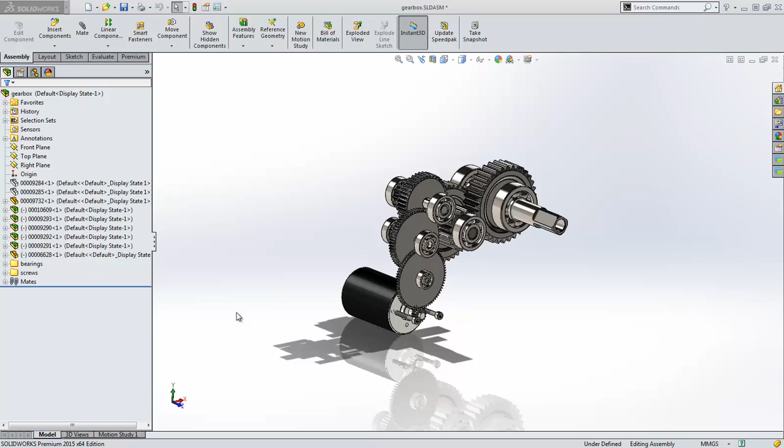SolidWorks 2015 introduces some great new enhancements to make your everyday experience easier and faster. The new View Selector gives you the ability to easily manipulate the view. Previews are also available, even if the view plane is obscured.

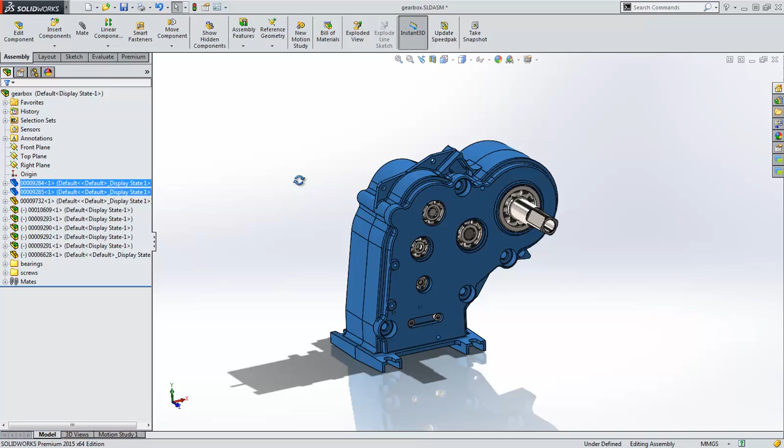Hidden components can now be previewed from the Feature Manager, without having to unhide unnecessarily. Isolating components is also improved in SolidWorks 2015. You can now isolate a component whilst editing it, and also isolate components from a common mate.

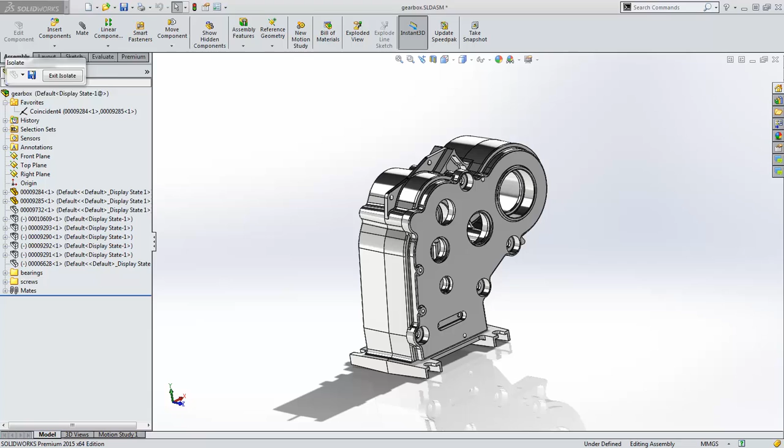In this case, we will isolate these two cast components and create a display state. In SolidWorks 2014, as new components were added to this assembly, they would, by default, be added to this display state. To preserve this display state, you can now choose the option to automatically exclude new components.

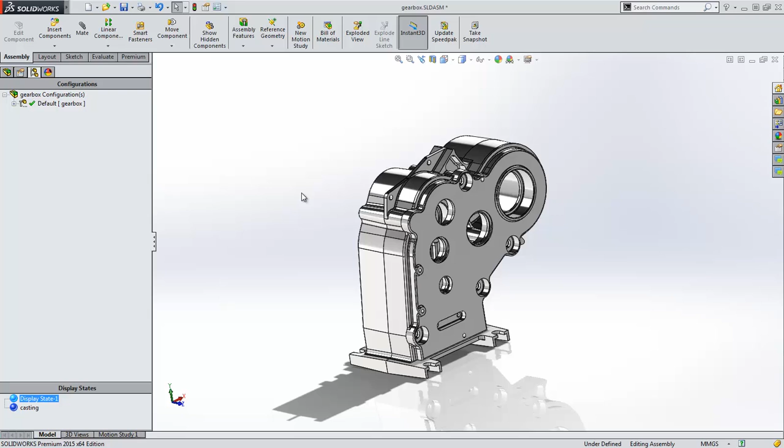At a component level, SolidWorks 2015 gives you the ability to track parent and child references using a great new graphical reference viewer. Embedded references, like sketches, are listed next to the reference arrow.

SolidWorks 2015 enhances the selection process in several ways. A new toolbar is available from the right mouse button and gives you the most commonly used commands. In this case, we will filter to faces and select some geometry.

Very often you may accidentally unselect before completing your task. We now have the ability to go back to that previous selection, saving us wasted time and effort.

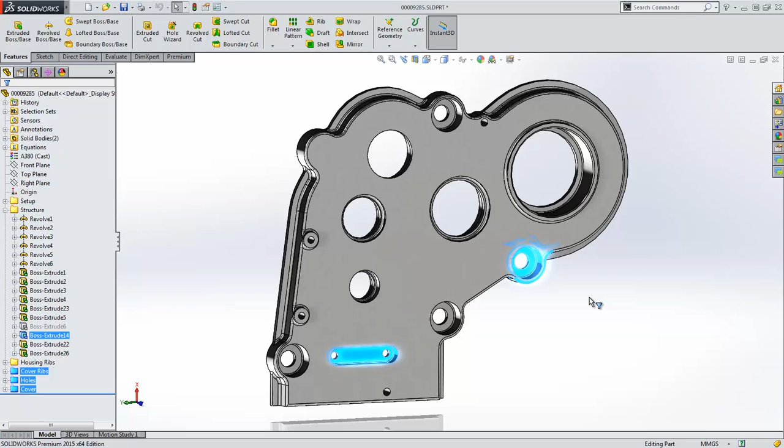Hard to pick entities like small surfaces are also much easier to deal with in SolidWorks 2015. Repeated small mouse movements now change the selection filter to faces, reducing the need to continually zoom in and out.

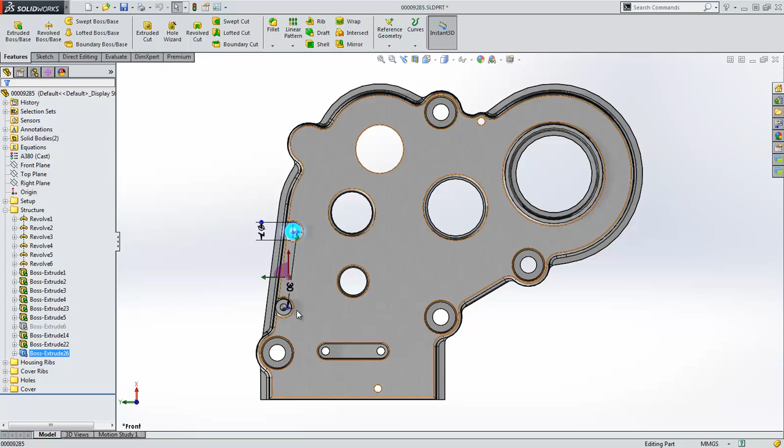Selection sets also allow you to store important geometry or components in a selection folder for later use in design or simulation.

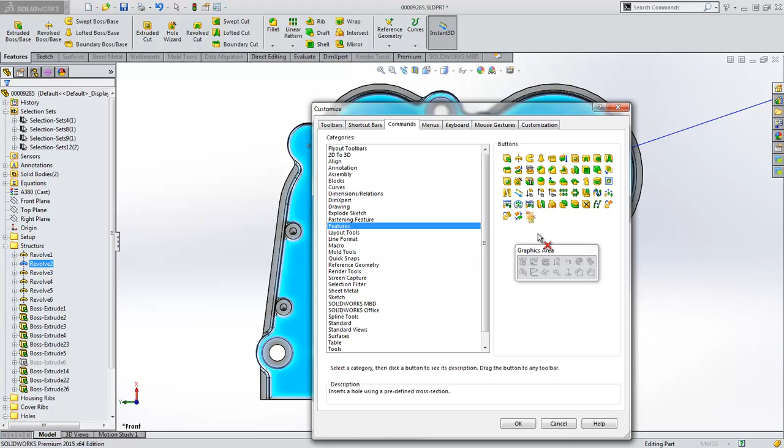You can now customize the fade-in toolbars in either the Feature Manager or the Graphics area. In this example, I will add a Hole Wizard command to the toolbar. I can now quickly select a face and place a standard hole very quickly and easily.

Finally, Toolbox is now improved to include the option to allow custom configuration names. We can also change the way that components are shown in the Feature Manager or reported in a bill of materials. Let's change this to show the file name in the Feature Manager and the configuration name in the bill of materials.

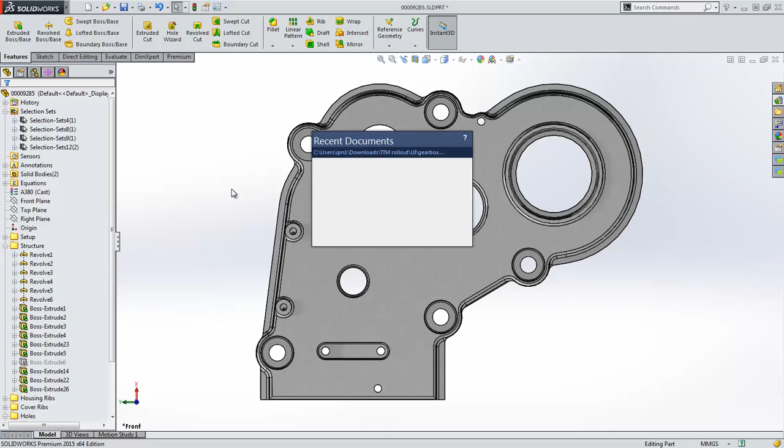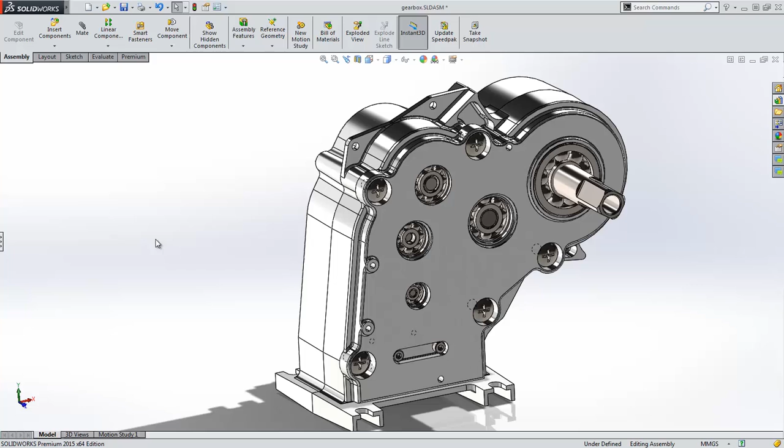I can now place a standard M6 bolt from the toolbox in the holes around the casing. We can now see that the file names are shown in the Feature Manager, and if we generate a bill of materials, we can see that this reports the components as the configuration name.

SolidWorks 2015 dramatically improves the user experience and makes everyday tasks faster and easier.